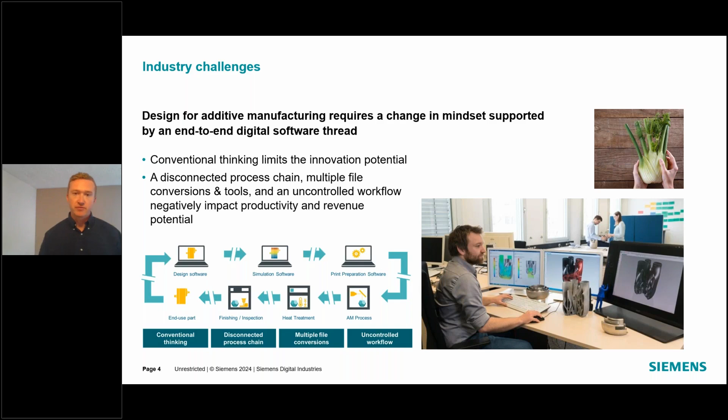There's a lot of different software packages, a lot of import and export that comes with the different buckets of additive manufacturing. One of the things that we pride ourselves on here at Siemens is that end-to-end digital thread for additive manufacturing. This slide is a sampling of a lot of the different buckets of functionality that we have in that end-to-end portfolio.

And it's going to be a guide for our journey down this webinar today. We're going to cover a lot of the design for additive tools and some of the other applications on our Xcelerator platform that can greatly enhance your additive workflow. You'll see a lot of value in terms of the connectedness of a lot of these solutions and how we can reuse a lot of that data downstream, without any conversion.

So in order to leverage additive manufacturing across your workflow, this is a little more graphic than the one we just looked at, where it incorporates a lot of the different aspects of the Xcelerator portfolio in NX, using that core traditional modeling environment, but integrating it with a lot of the other tangential pieces that come into play with additive manufacturing, where we're doing design space optimization, embedded CAE analysis and material science, also leveraging new technology from artificial intelligence and machine learning to really enhance your workflow.

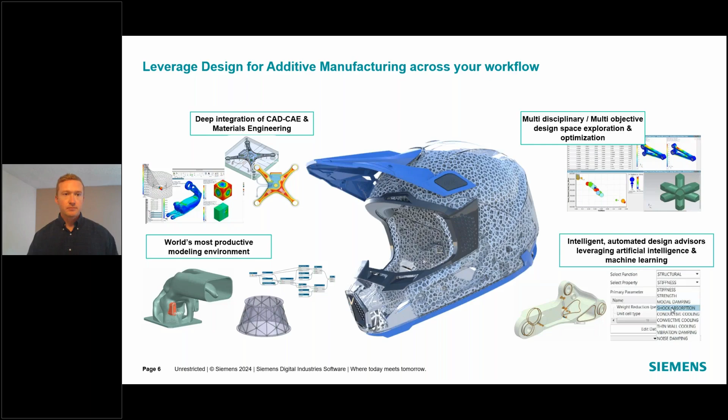So when it comes to design for additive, a lot of that traditional design methodology gets replaced a bit with the question of what are the actual performance and functional requirements of my design, where those really drive what the end result of your design is. This is where we take a lot of those different tools from generative engineering, topology optimization, embedded CAE, and combine them together in a system context where we can incorporate a lot of those different aspects to create that particular design.

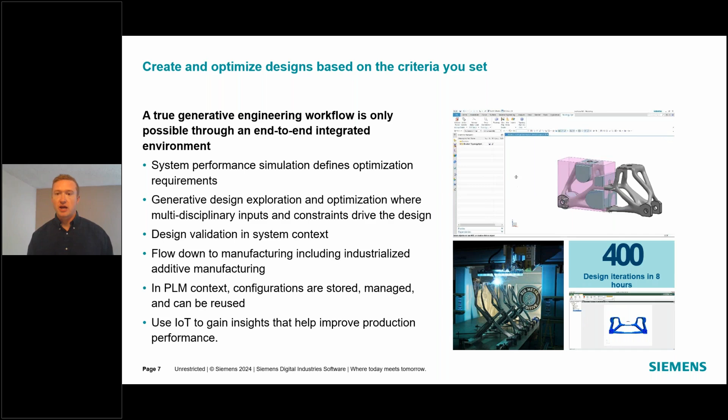And of course, a lot of that flows down into our other applications for actually planning for the manufacturing, for validating those designs, data storage, and again, a lot of those insights from machine learning and production performance.

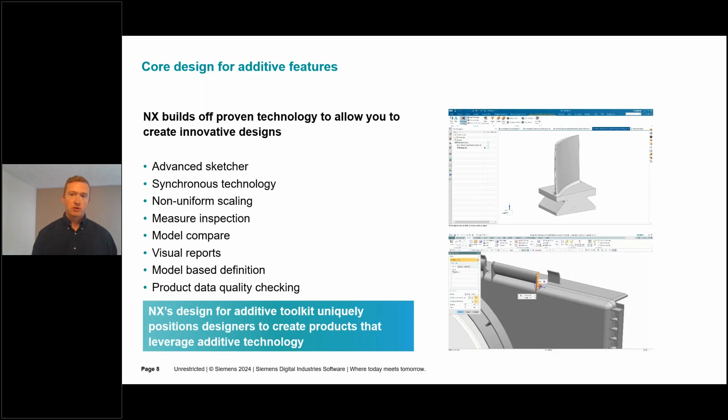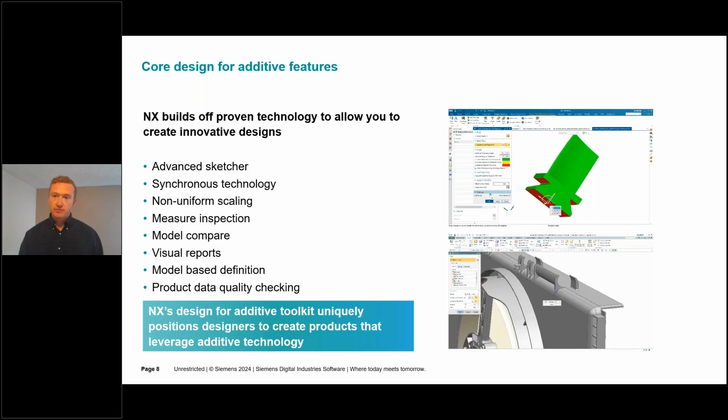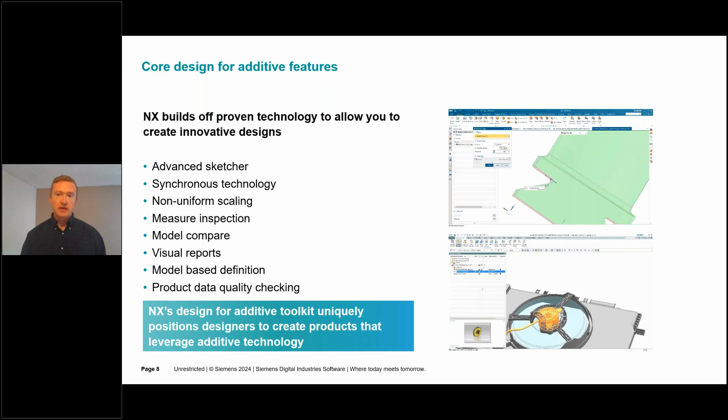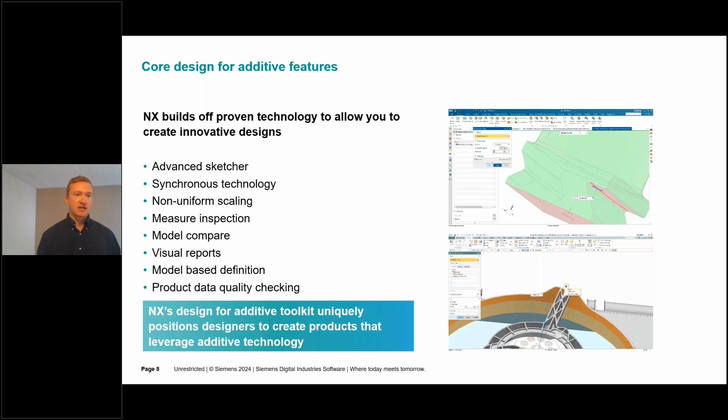So to kind of start off in the core design realm, NX utilizes a lot of those core best-in-class design capabilities that you'll see in a lot of different CAD packages, as well as capability from synchronous modeling, advanced sketching, and things that come into play with additive, from reverse engineering, working with scan data, quality and definition of our eventual designs. There's a whole career's worth of capability I could talk about for incorporating traditional design into that eventual output.

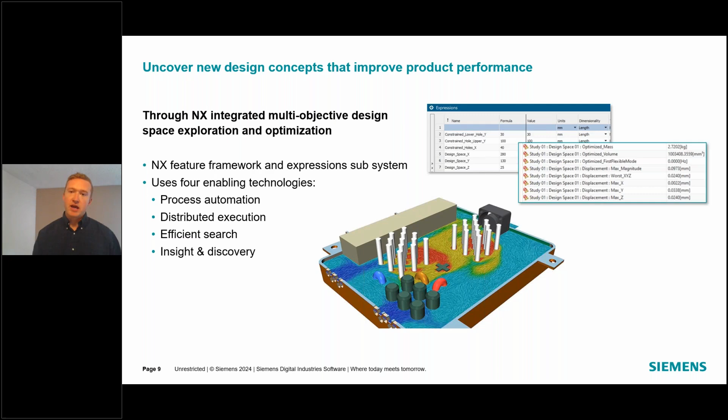But one of the things that really comes into play with additive is those core functional requirements. So one of the things we've developed over the last few years is this capability to do multi-objective design space exploration, and incorporate that with a lot of our other additive applications, where we can utilize those embedded parameters within your design context and search through that design space to arrive at that optimal design, utilizing your goals and objectives.

This is an application called NX Design Space Explorer. It's designed to utilize your core design parameters and features, explore that range of design space that you may define, what are your constraints and objectives, and then search through that to arrive at the best optimal design utilizing those different parameters.

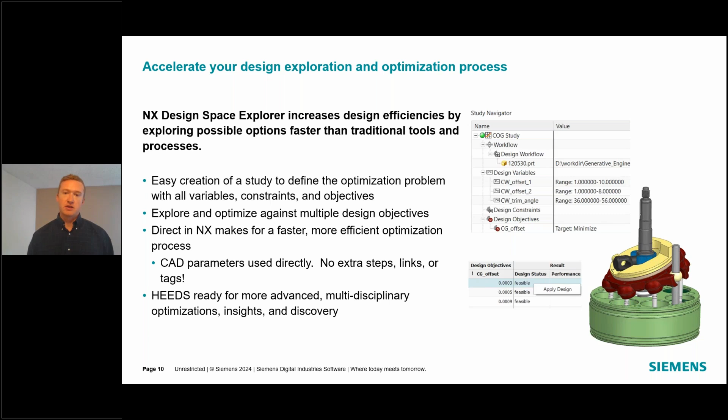And again, you'll hear me talk about this a lot today. This is where we incorporate that with a lot of our other advanced CAE, or this HEEDS capability that we talk about - that automated iterative feedback loop where we test, evaluate, and then use that to refine our search. So this is a relatively new application that has gone into NX for looking at a lot of the possibilities that you can define using that traditional design process.

Another thing we've developed in terms of that NX portfolio is this application we call NX Performance Predictor, where it'll give you real-time feedback in the design phase. We set up a simple CAE analysis that'll run iteratively whenever you change the actual design of your part, so we can explore a lot more prototypes and concepts and get real-time feedback.

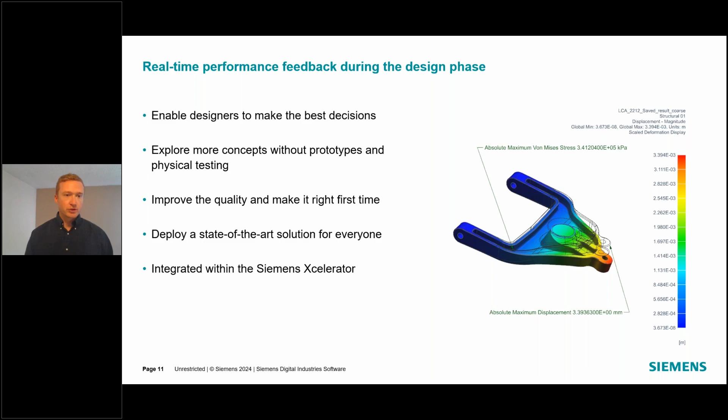You're seeing on the screen, it's evaluating the maximum displacement and stress of our design. It's doing this in the design application. Once we set it up, it'll just constantly refresh itself once we make a change to our design. So we can arrive and get that feedback on what our design's performance is going to be without having to go through multiple loops with a CAE analyst, for example.

What that looks like visually here is that traditional method of making design iterations, simulating those, and then incorporating that into our release design, where what Performance Predictor is designed to do is every time you change that design, give you that early-on feedback on what your design is actually going to do performance-wise, so we can arrive at that eventual design much quicker.

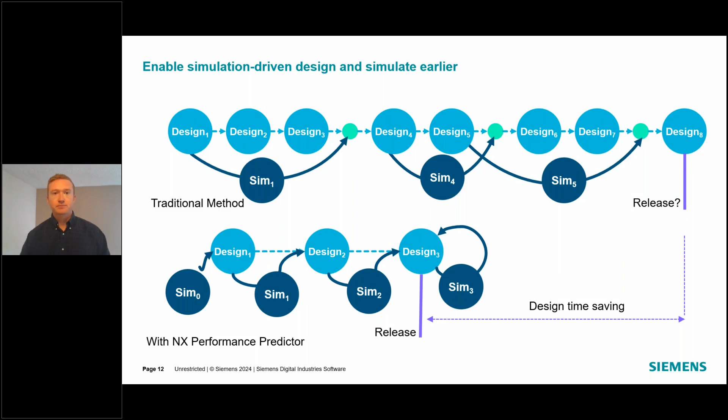Along the same lines of giving you that feedback early and often inside of NX, we've had topology optimization baked right into NX for years now. It's an embedded product in the design world, where we utilize functional requirements to optimize the geometry of components or assemblies, to perform what-if studies, and to generate an output that we can consume downstream in a lot of these other applications. It's fully baked into NX.

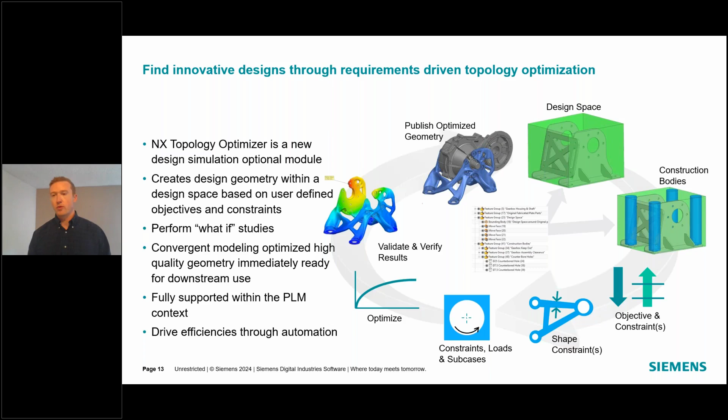This is where we specify what our functional requirements are, what kind of shape constraints and manufacturing methods we want to use. And we're going to let the system do the work for us and arrive at that geometric solution that best solves our problems.

I mentioned the component and assembly optimization. This is where, over the years, we've enhanced that capability inside of NX. Almost every single major release we do, we look at other use cases within additive manufacturing, whether it's multi-component optimization, multi-design space optimization at the same time, differing materials, or other optimization methods.

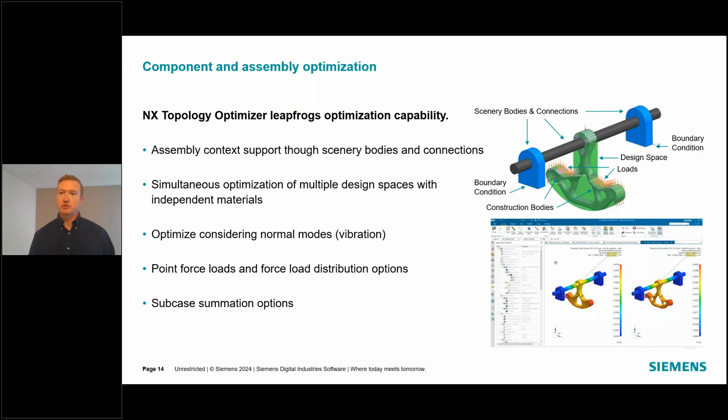So we're bundling a lot of this functionality, and again, we do it right in the design process. What we've looked at so far is that ability to explore your design space and arrive at that solution or optimized solution, give real-time feedback on what that performance is, and then, based on that, we can further optimize the component or the geometry using this embedded topology optimization.

One of the things that in additive manufacturing you deal with a lot, especially when it comes to topology optimization, is working with facet data and mesh geometry. Whether it's from topology optimization, reverse engineering, quality inspection data, or an output mesh from CAE, it's a common data format that we work with all the time. Baked right into NX is this capability to do direct mesh editing. Think of your classic clean up, smooth, fix, fill, snip, those direct facet operations.

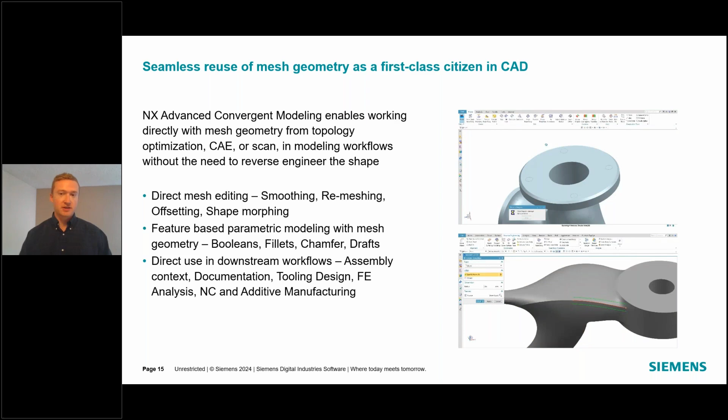But one of the most powerful things about NX is this capability called convergent modeling, where we can do parametric feature-based modeling directly on facet data. Again, we can consume it and use it downstream. We're putting parametric features on mesh data so that we can perform the action that we need to, and then move on throughout the rest of our process, regardless if it's facet data or not.

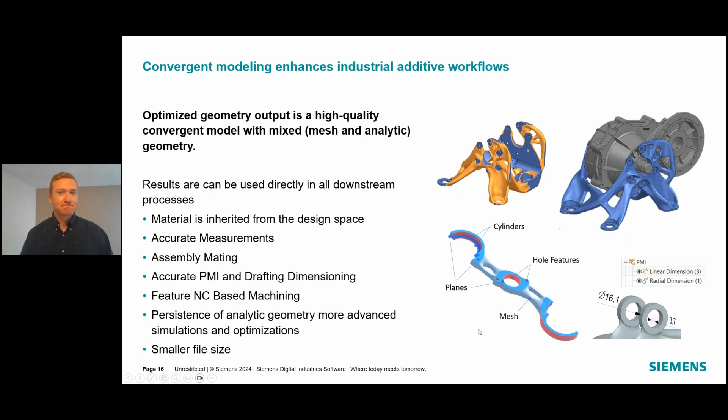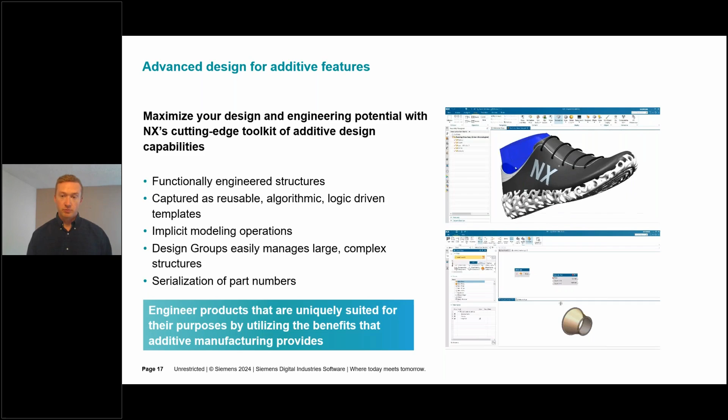Some other design for additive capability that also comes into play outside of working with mesh geometry is working with lattice structures and what we call implicit geometry, where we may design additional features after we've gotten out of the optimization process. We want to further refine and enhance our design for the manufacturing process. Again, baked right into NX, we have applications for generating rod and ball, traditional lattice structures, as well as that implicit modeling environment that you're seeing in the upper right-hand video here. This is where we do all of our TPMS structures, as well as give you that freedom and flexibility to author your own, from whichever perspective, equation based, that you're incorporating into that design.

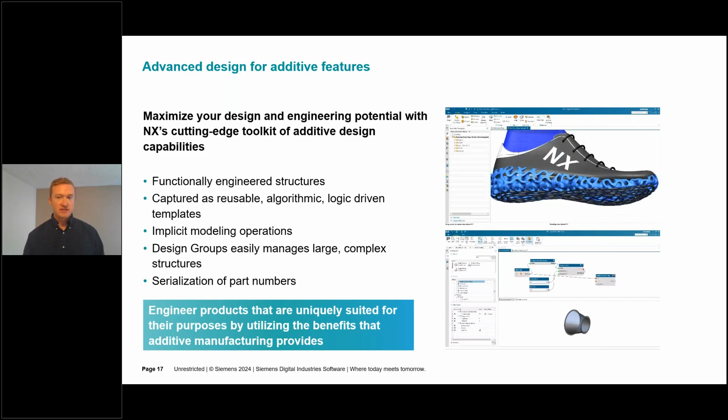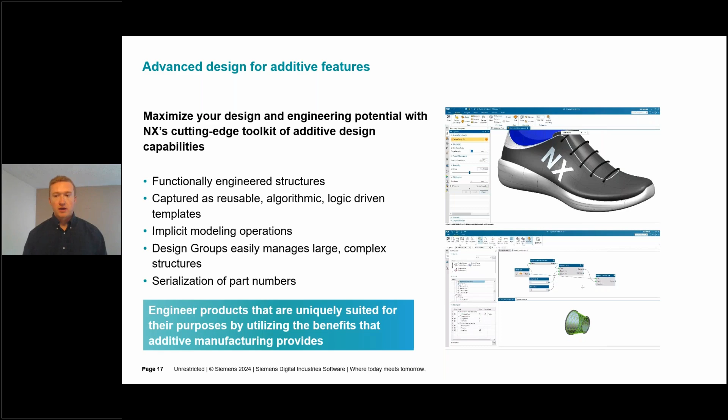Other things that come into play in design for additive that we've enhanced and created over the years is this algorithmic modeling environment down in the bottom right-hand corner. This is where we stack that node-based structure into a logical rule that we can apply with a drag and a drop, and it's going to do a lot of advanced design capability for us that we can store in a reusable object and then consume over and over and over. And so it opens up the capability of NX, a lot of that core design as well as additive design capability you'll see in that environment, and we can bundle up those complex patterns or common workflows into this algorithmic capability that users can just drag and drop and easily apply onto a particular design.

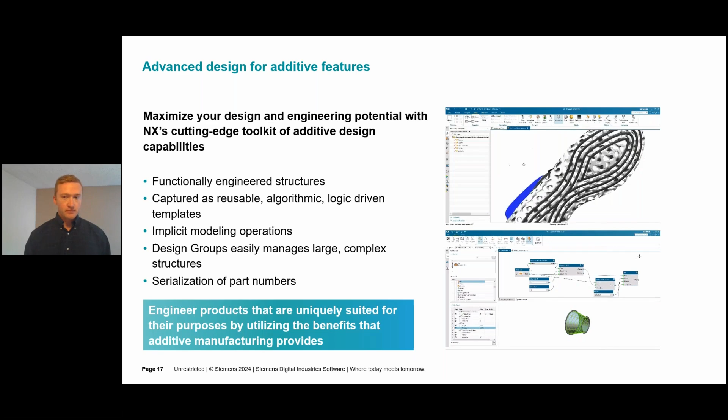Other things that also come into play with additive is doing a lot of prep work for manufacturing, serialization. And again, I mentioned this earlier, there's a whole career's worth of tools inside of NX here that I could talk about that touch a little bit of that design for additive workflow.

I kind of mentioned validation a little bit. At this point in our journey, we've looked at our design space and functional requirements. We've done some optimization, we've done some further refinement of that design using tools like implicit modeling, convergent modeling, and algorithmic capability. At this point in the process, we move on to the validation of our part for the actual manufacturing process.

One of the things I mentioned earlier is the topology optimization environment utilizes that capability of the manufacturing process and designs that into the actual product when it does the optimization. But with a lot of the other use cases in additive, we want to validate that before we actually get into the print preparation or onto the actual build plate.

This is where the NX design for additive manufacturing validation tools come in, where, still in the design modeling world of NX, we can look at common manufacturing issues of our designs, like overhang angle, minimum wall thickness, minimum radius, orientation optimization, trapped supports and powder, a lot of those different gotchas that can come up in the manufacturing process.

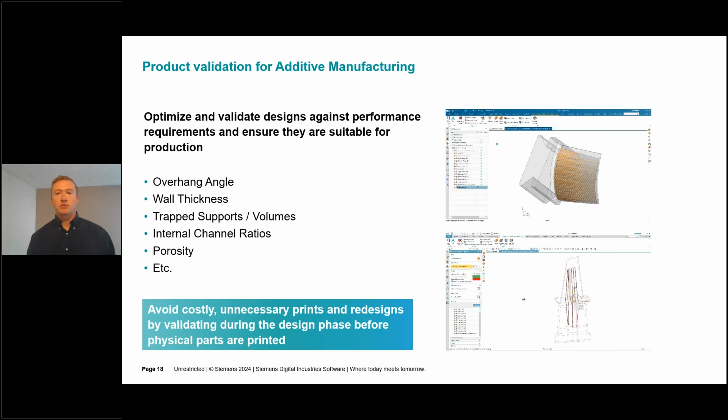We can analyze and account for them early in the design process. Like the performance predictor, which gives you real-time feedback, these live with your design, so that as we make changes, these results update and we can see that information as we change our design throughout our workflow.

Moving on, once we look at that analysis for the manufacturing process, we may want to do further advanced design validation, advanced physics simulation. Again on the NX platform, in a different application we call Simcenter 3D, we can do our fully baked CAE analysis and verify those optimized results with our requirements.

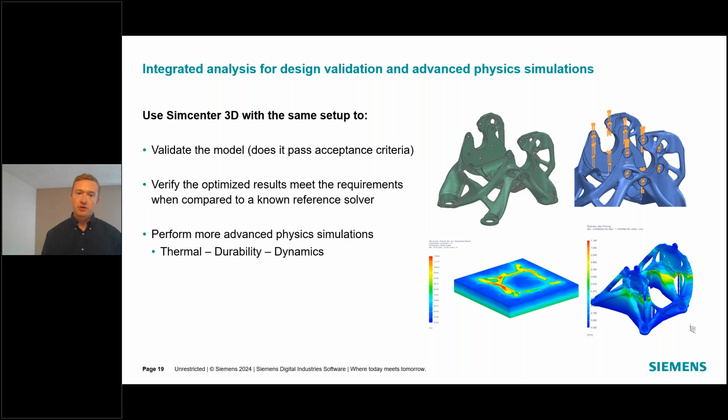This is where that data transfer comes into play: we don't have to import, export, or do any data transfer. It just consumes the data that we've created in modeling. In an optimized structure like this, we can utilize the exact same mesh that our optimization engine outputs and consume that in some of these other advanced physics simulations. This is where we get into the multidisciplinary optimization component of the presentation, as well as our other advanced physics simulations that you see on the screen.

Along those lines, once we've validated our model, we have that collaboration with our manufacturing applications, whether it's model-based definition, build preparation, or post-process machining. In the same way, we consume that data in these other applications of the NX platform, so we can take that data, account for that particular area we're looking at, and then move on with our broader workflow in additive manufacturing.

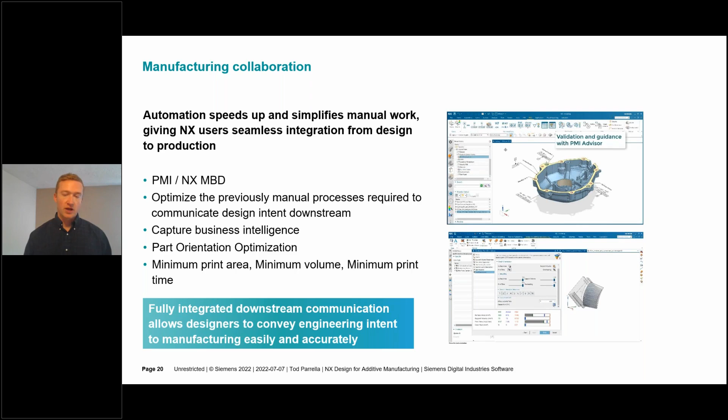I mentioned orientation optimization; that's something we consume in the manufacturing environment, so that as we design and find that particular orientation, we have it saved so we can just reference it later. Likewise, you're seeing in the upper right-hand video our integrated tools for creating PMI and model-based definition, as well as doing that autonomously with some of that node-based algorithmic capability.

One of the big things in additive manufacturing as well is validating the actual process, avoiding scrap and potential rework and getting to that first-time-right print. This is where our embedded CAE tool inside of NX looks at the actual process of producing the part on the machine.

In the laser powder bed fusion use case you're seeing on the screen here, we can simulate that build as it gets built, looking at things like the powder, the thermal distribution, multiple parts nested inside of that build, multi-laser scenarios, and distortion at different stages of the process during printing, cool down, support removal, heat treat, stress relief, and

We get a lot of information that comes out in terms of: are we going to have potential recoater issues, are we going to have any shrink line prediction? As well, on the bottom right-hand graphic on your screen, you're seeing that compensation workflow, where we can take the results of all of this simulation output, that thermomechanical simulation, and we can distort our original part so that it arrives as close as possible to that nominal geometry.

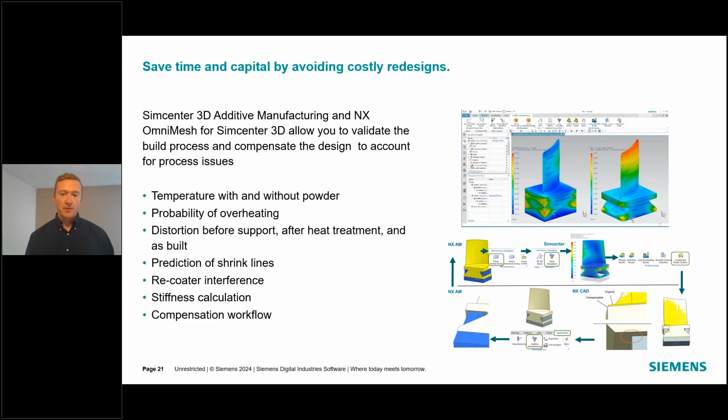Other things that come in here is we can actually have that iterative feedback loop that's baked right into this application and capability where we can simulate that build, we can distort it, and then run through that loop multiple times to optimize our original nominal geometry so that it best is compensated for that particular build process that we have.

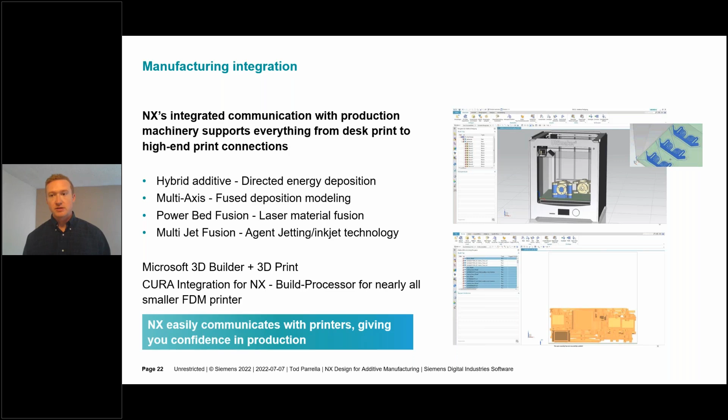We have a lot of relationships with those OEMs and smaller print manufacturers to integrate that capability directly into NX so that we can say we're going to produce this on a certain machine. We can set it all up, design our supports, generate our actual build files, and then walk over to the machine, load it, and hit print. So we're constantly enhancing and expanding the OEMs that we're working with to bake this capability right into NX from the get-go.

So we covered a brief overview of a lot of the different design for additive tools within the NX portfolio here. We talked a little bit about that core modeling capability, a lot of the different advanced additive design modules that are within NX. We looked at topology optimization. We looked at the Design Space Explorer, and the implicit modeling, working with facet data and convergent modeling capability, some of that algorithmic topology optimization. There's a lot of different applications that go into that advanced design bundle.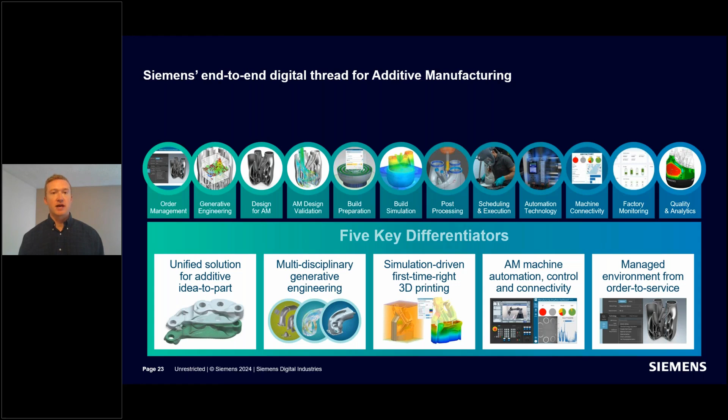So again, with the kind of design for additive tools that we took a look at today, hopefully you guys saw that there's a ton of capability and possibility for enhancing and improving and innovating with Siemens NX, where you can deliver that high quality product quickly, using a lot of these different tools.